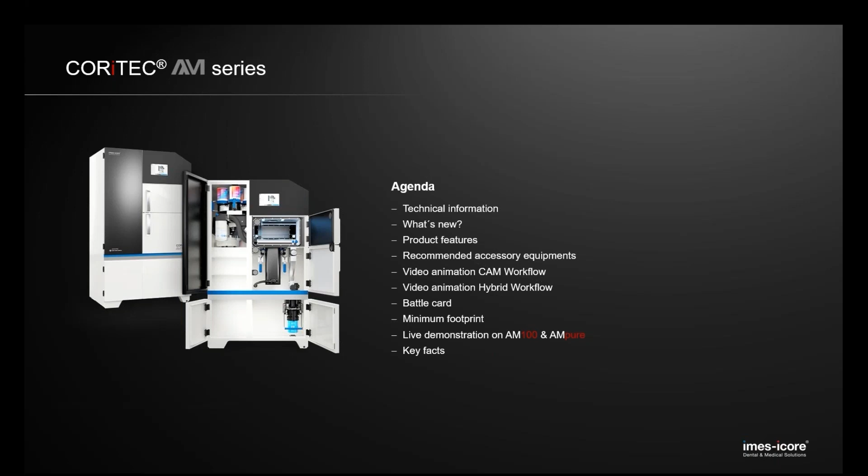In this presentation, we will explain the CAM and hybrid workflow using video animations. These videos can later be downloaded from our Dental Smart Market. During the presentation, we will switch live to Alex, and he will show and explain in detail the specific areas of the AM100 and AMpure. Let's have a look at the AM100.

The unit price for this unit is 121,000 euros. On the technical side, we have the powder supply with 25 kilograms of powder. This guarantees 24/7 production. With the 250% overdose function, we are able to look ahead if a cartridge is empty, and in this case the printer takes the next cartridge to build the job.

Loading the machine with prepared new powder during the ongoing production process is possible, of course. A 200-watt fiber laser is built in, and we are able to produce up to 500 units per day. The power supply connections are standard, and a high tension current connection is not necessary. The powder and cartridge system is certified and quality-tested powder for the CORiTEC AM100 system.

Supplied ready to start in the proven form, the powder container also serves as a supply container in the machine. The material is fed directly into the process without excessive filling and without getting into contact with the powder. Alex, please show and explain the function of the AM100 cartridge system on the unit.

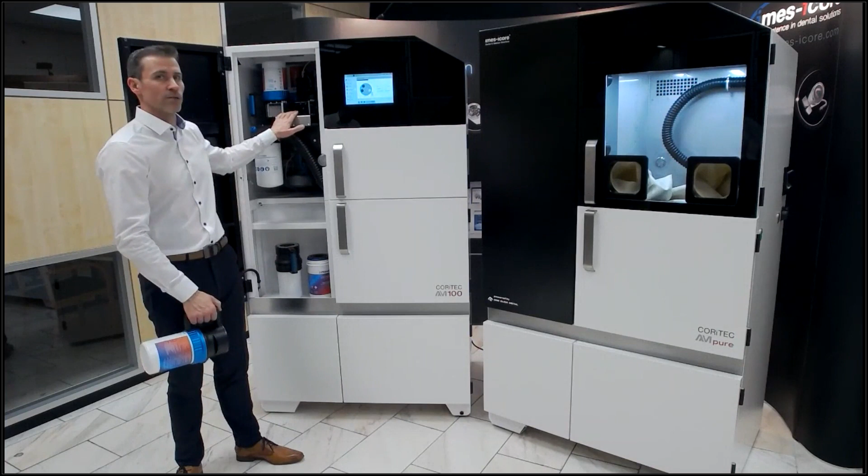The powder supply of our AM100 printer is located in the upper left-hand area of the machine. The unique feature is the closed cartridge system, which is easy and convenient to handle. The revolver module has a capacity of 5 powder cartridges, and each cartridge contains 5 kilograms of metal powder. With this special solution, we have reduced powder contact to a minimum.

Fresh powder is packed and delivered in special cartridges. The operator simply has to screw the interface onto the cartridge and enter the initial information about the material and fill level in the user interface. The cartridge is now ready to be used in the printing process.

We have two different types of cartridges: one is the overflow cartridge with the black safety ring, and the other is the supply cartridge with the blue safety ring. This allows the operator to directly recognize which type of cartridge and which material he has.

Due to integrated NFC tags in the cartridges, located in this part of the interface, the machine automatically recognizes which cartridge has been inserted. The status and fill level of the cartridges is displayed in the user interface. The supply of fresh material into the building process is completely automated.

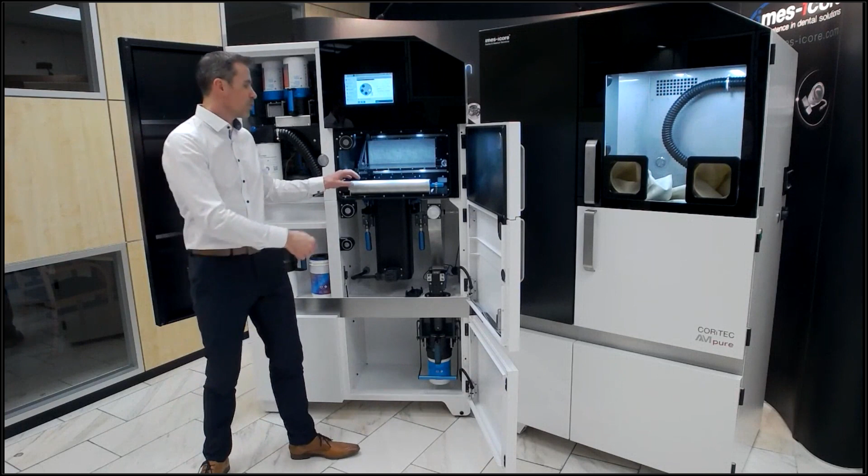On the left side of the process chamber, you have the powder dosing system, which ensures a continuous powder flow during the building process. Right here, we have the coater. The coater applies the powder over the building plate. It moves from left to the right.

This means from the powder dosing system to the overflow. The 200-watt laser is integrated on the top of the process chamber to ensure that you always have the whole building plate covered with powder. The conveyor system provides some excessive powder.

This excessive powder is transported by the coater into the overflow slot. It falls into the funnel below and is collected there. By activating the operating button on the user interface, the excessive powder will be transported into the overflow cartridge.

So how does the laser melting process in our AM100 basically look like? The building plate is clamped into the building module and aligned to the base plate. The coater spreads very thin layers of 20 or 40 microns of metal powder over the building plate. The laser on the top of the process chamber melts the powder in the areas where the components are located.

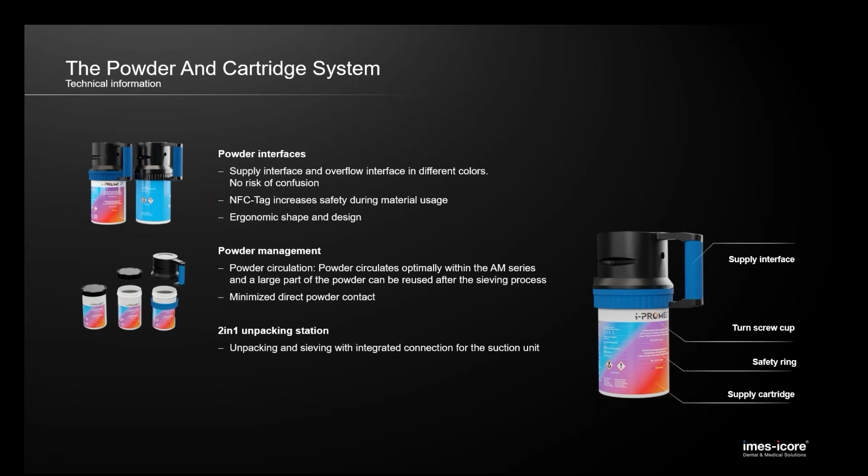The AMpure, with the unit price of 45,000 euro, is a 2-in-1 unit. It is an unpacking and sieving station in one. The customer has the big advantage that he can unpack his building plate in the unpacking station and he will not lose the powder. Also, he cannot get in direct contact with the powder. After the unpacking, the remaining powder will sieve automatically for reuse.

For some markets, we have the AMpure Lite with the unit price of 30,000 euro, for markets which are not so sensitive in relation of powder handling. Therefore, we have the option to order only the AMpure Lite, which is the sieving station. The powder which was used in the AM100 can be sieved in the sieving station and reused in the AM100 printer for new building jobs.

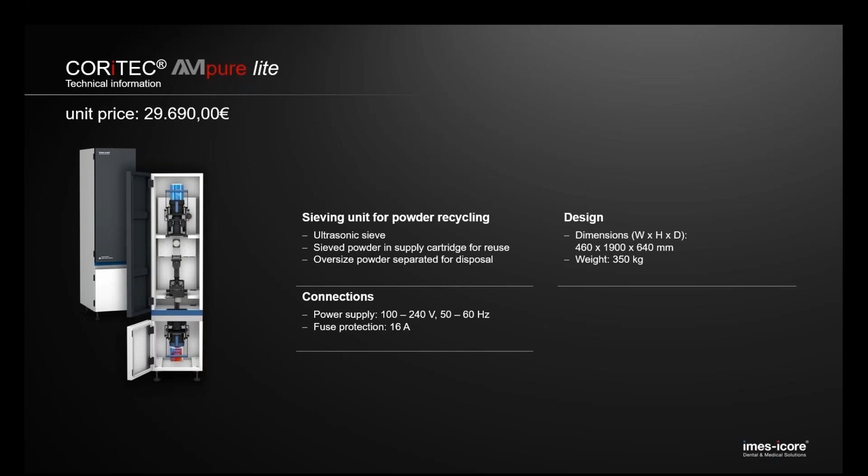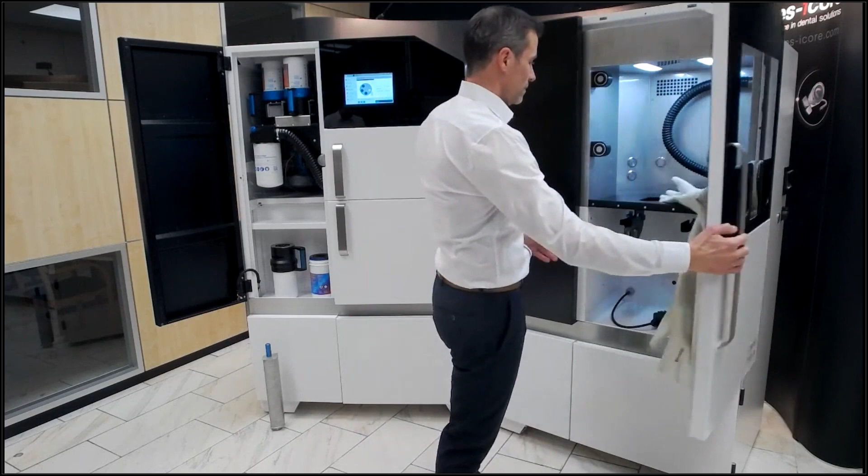Alex, please explain us more about the function and using of the sieving and unpacking station. In this step, I will show you the sieving and unpacking station AMpure. Here we have basically the same system as in the printer AM100. You disconnect the safety cap from the building module, put on the plug, and then you can fix the building module mechanically with the help of the levers.

When the doors are closed, the buttons on the rear wall of the unpacking chamber can be operated by using integrated rods. You can see the operating buttons here. The loose powder surrounding the components can be swept into the overflow slot on the right side of the unpacking chamber by using a brush.

From the overflow slot, the powder falls down into the funnel and will be automatically conveyed into the overflow cartridge below. Powder residues on your parts and in the unpacking chamber can be removed by the integrated vacuum cleaner connection. So again, as soon as you open the door, all the powder should be removed and you have really minimized the powder contact. The focus is on a really easy operation for the user.

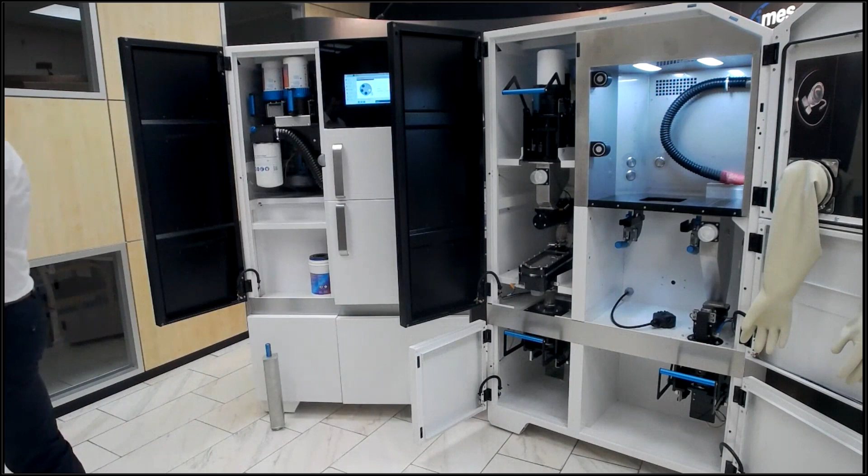What's new? The latest development from imes-icore is the integration of titanium powder into the AM100. This means that with this printer, you are able to use titanium and cobalt chrome. We cover both materials and can print all indications and dental restorations. Existing printers already installed in the market can be upgraded for titanium.

The next innovation is that we give the customer the opportunity to choose between two different parameters with which the printing should be started. The difference between the two values of 20 and 40 microns is not obviously noticeable, but can rather be seen under the microscope.

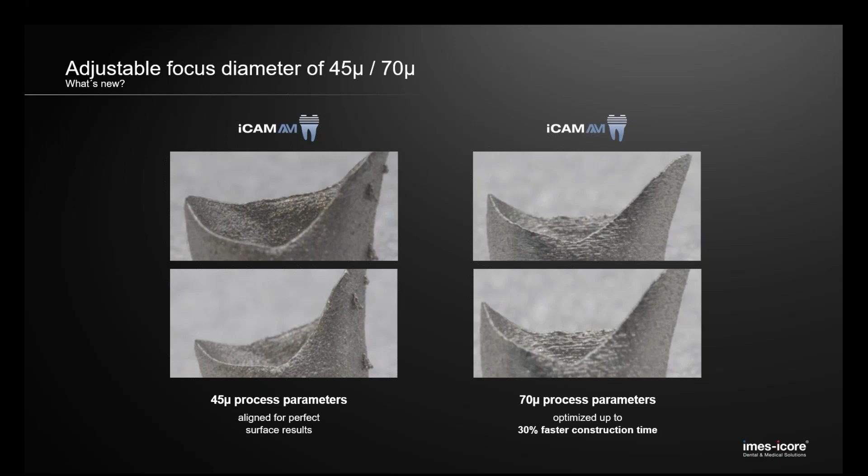70 microns can be used for faster and mass production. The printing time with 45 microns is approximately 11 hours for the complete square plate. With 70 microns, your printing time is 30% faster and shorter. Up to 250 units can be printed in this time.

The next improvement is that customers who have one or more other printers in their company and use the Oqton software are able to add the AM100 into the Oqton software. imes-icore and Oqton have closed a collaboration together, which means that the Oqton slicer software now supports AM100.

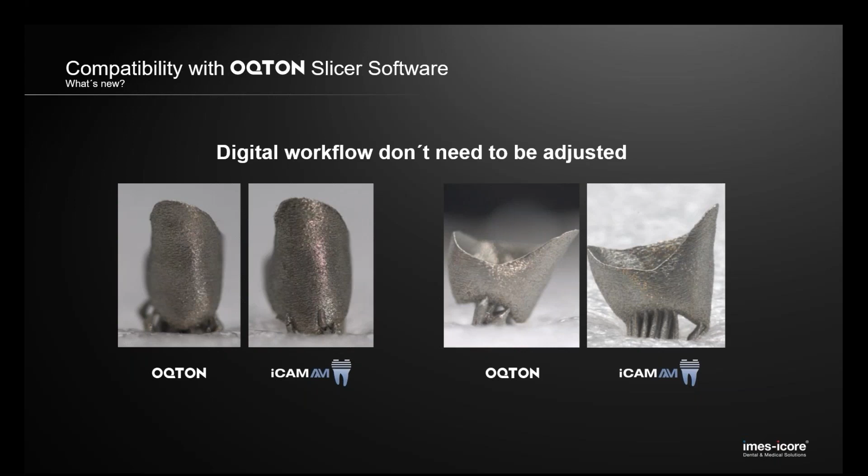This is a great opportunity, cost-effective method, and advantage for customers who have other printers installed in their lab. You can add the AM100 into your existing workflow, and the digital workflow doesn't need to be adjusted by you.

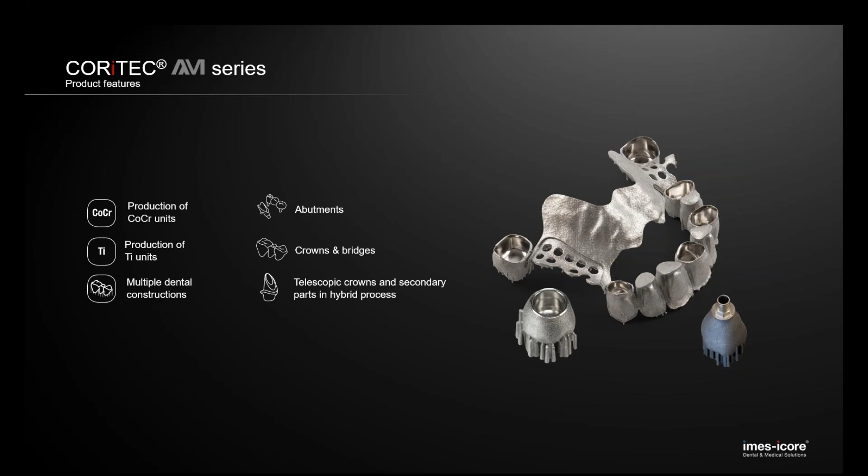As both materials, cobalt chrome and titanium, are supported, there is no limitation of indication with both materials. Crowns, bridges, abutments, and multiple dental constructions can be printed. Instead of milling or casting removable partial dentures, you can print removable partial dentures too. Depending on the size, we are able to print between 6 to 12 removable partial dentures in one job.

The biggest advantage of the AM100 system is that hybrid processing with imes-icore machines is possible without limitation, and it's integrated into the complete digital workflow. For the hybrid process, you take the round building plate of 115 millimeters in diameter and print on this plate.

After the printing, we put and use this round building plate in our imes-icore machines. You can print high superstructures in titanium and or cobalt chrome and remill the implant surfaces directly in the imes-icore machine after printing. The milling and printing time together is faster because in one job cycle we can put different indications on one plate. The hybrid solution is available for the 350i series and 650i.

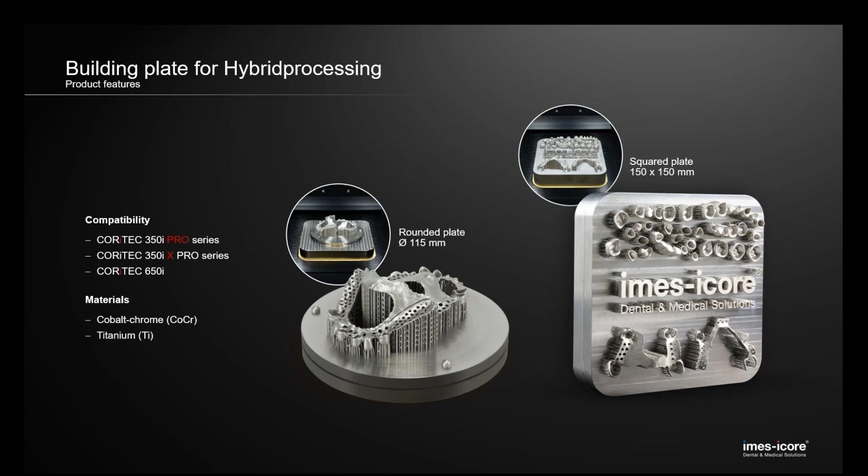This step will be described more in detail in a video later. imes-icore is the only company offering a complete validated workflow for the hybrid process with its own products. Additionally to the machines and powder, you only need the ICAM V5 software and the ICAM hybrid add-on module. ICAM AM is the slicing software for the printer.

This means that imes-icore tested and validated these three software modules with approved powder, ensuring a high precision result after printing and milling.

With the AMconnect remote access, you are able to monitor the printing process from your home or wherever you are. A camera is built into the AM100, and from wherever you are, you can monitor the printing job, see the remaining time of the current construction job, and in case of an emergency, abort the job. To use AMconnect, you need a PC, a laptop, or a mobile phone with an internet connection.

The CORiTEC AM100 HMI is a friendly and easy operation software for the AM100. With only 6 clicks, you can start the printing job. The software guides you step by step, so you are not able to make a mistake.

The design is very simple, intuitive, and reduced to the minimum. It leads you through all of the steps. You can go through the menu sections and check if the machine is prepared correctly. If the settings are correct, the individual points are ticked in blue. You don't need big expertise to start a building job, which is really convenient to use.

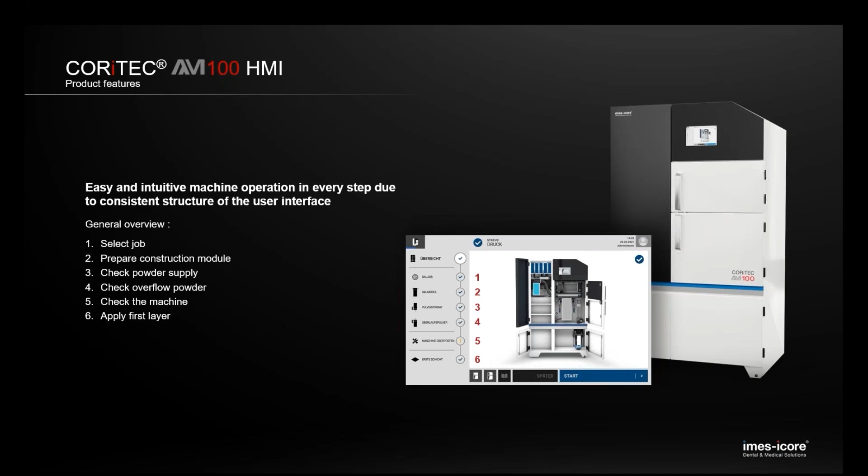Besides the AM100, AMpure and software, we are offering accessories which you need to have a complete system. These are suction unit, chamber oven, annealing furnace, gas generator, and metal bandsaw.

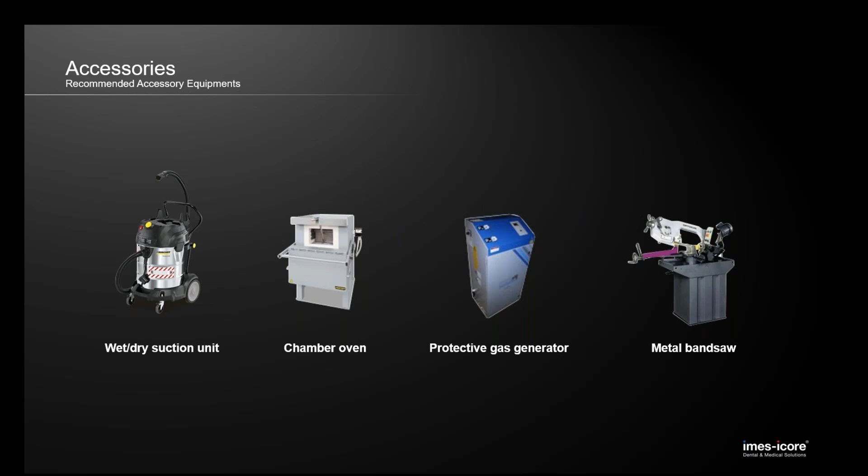As I told you in the beginning of the presentation, part of this webinar are some videos which are showing the different steps of the complete digital hybrid workflow. Let us start with the first video, how to work with the CAM software and prepare the dental restoration in the CAM software for the printer.

For metal printing and remilling of objects with CORiTEC machines, we need the CAM applications iCAM V5 Smart and iCAM AM. After selecting iCAM V5 Smart, we use the New Job button to select the milling machine with which the remilling work will be carried out later. We select the material, cobalt chromium, and the machine holder on which the 3D job will be built and reworked afterwards. After confirmation, a window opens to select a suitable construction type for the remilling, for example, bridge.

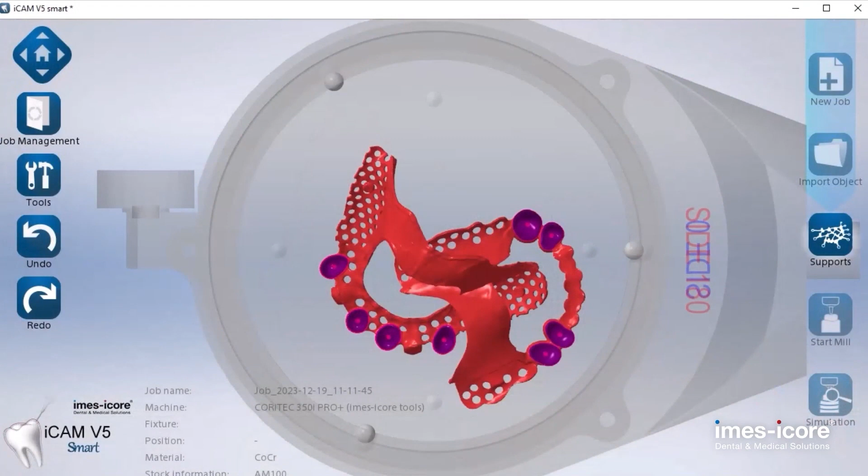At the same time, we load our two project files in STL format from the browser into the holder. After confirmation, the two objects appear on the holder. They show up in red because there are some overlappings. Click on an object to highlight it and use the positioning arrows to move each one until both appear collision-free on the base plate in gray. You can lift them up or lower them, tilt them, just bring each of them in any suitable position.

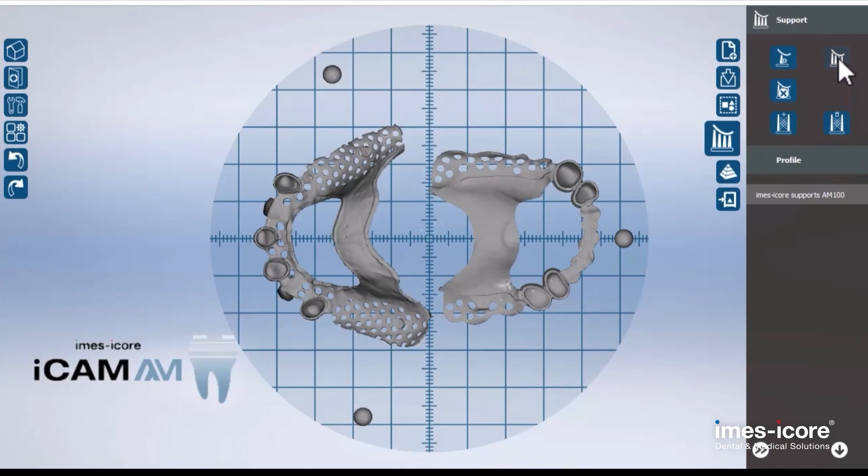The button at the top left allows us to inspect the objects step by step from standard perspectives without having to rotate or tilt them with the mouse. Next, we want to create the supports, which is handled in the software iCAM AM, so we must export the STL file there. The supports are generated by the iCAM AM software, also named the slicer software. Click the button to get there. This is where the job from the iCAM V5 Smart software with all the orientation geometries is transferred.

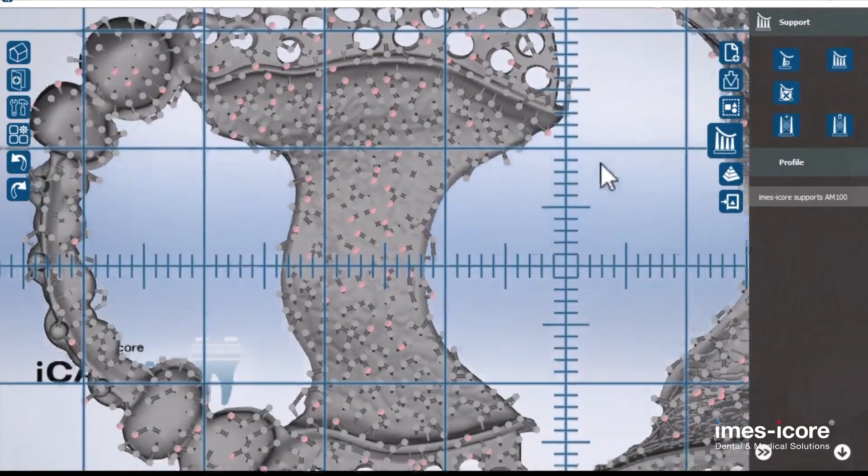Now we need to create the supports. Click the icon and after a short while you will have them constructed. Hundreds of tiny props are built as supports that will carry the objects in space upon the building plate. They can be viewed from different perspectives, for example from the bottom, where they appear as small dots. These supports can now be edited. Each one can be moved or deleted if superfluous. If supports appear inside cavities or at inappropriate places, delete them. Different perspectives help to get a good image of the whole construction.

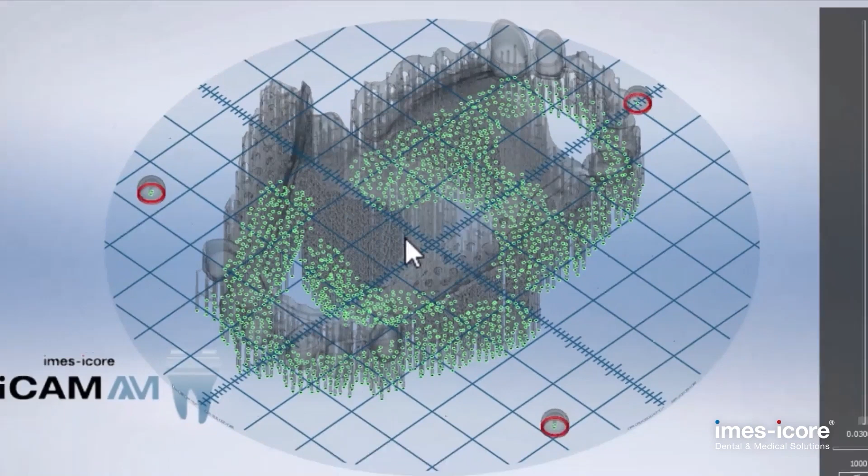If the supports are all okay, we create the print file by slicing. This is the principle of how the laser at the end will act to build it slice after slice, layer by layer. Click on the pyramid button and add, for example, the descriptive name demo plate to the end of the print file to distinguish it. In a simulation, we can now have a preview to examine the printing process layer by layer and inspect it moving forward and back. If the structure meets our requirements, we close the simulation and switch over to the print button.

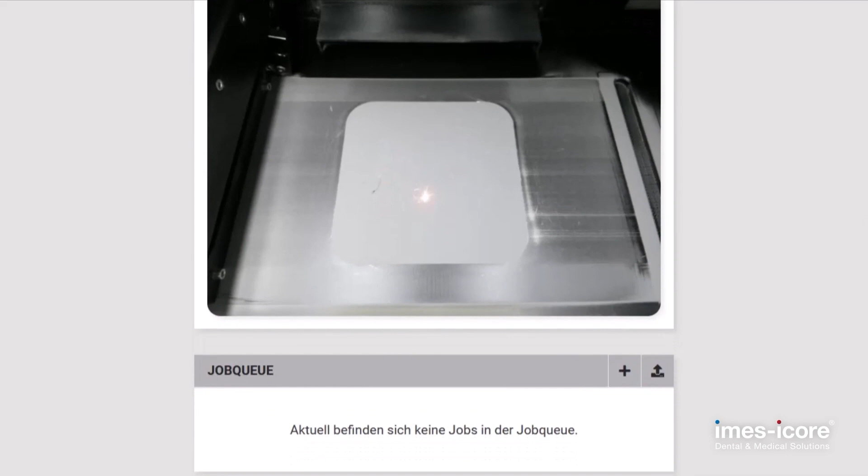This will now open the AMconnect remote software to transfer the print job we have just created directly to the job queue of the AM100 machine. Everything now has been done and we are ready for 3D printing.

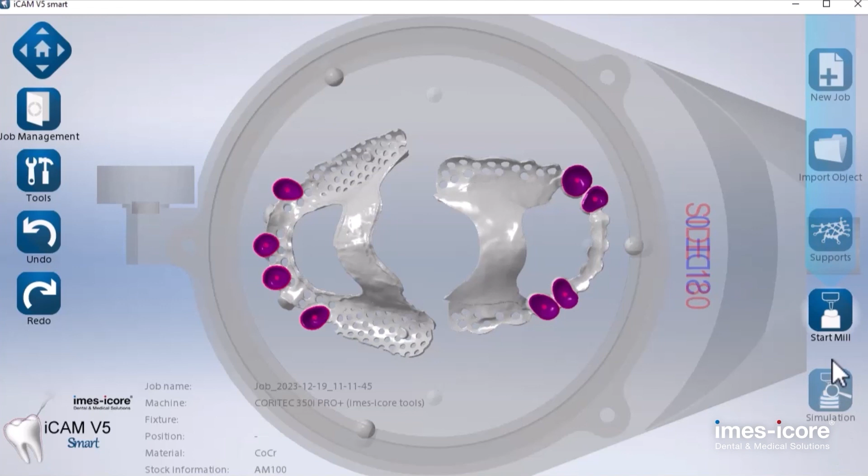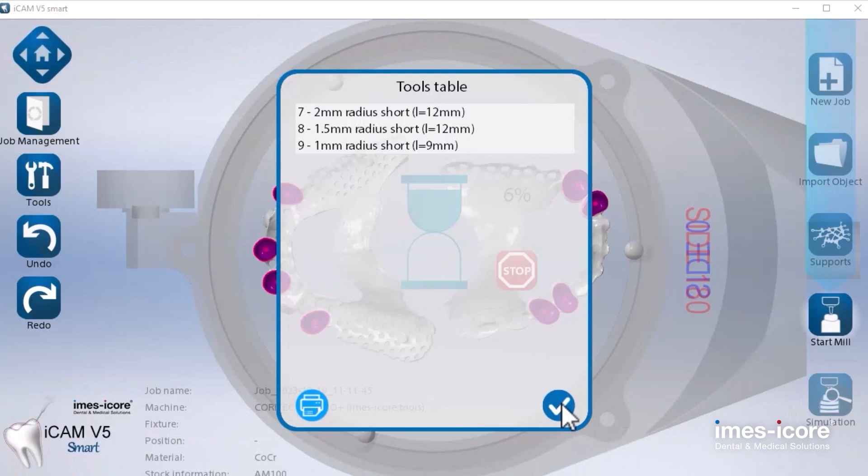But we already have the remilling in mind and switch back to the iCAM V5 Smart software to generate the milling file. The purple colored areas are those that need to be remilled with the aim to reach a perfect engineering fit for the cavities. The details of the milling strategy are displayed, showing the individual steps of the milling process. A milling cutter list provides an overview of the required tools. The milling job now is generated. Now the work of building the job with the CORiTEC AM100 machine begins.

Okay, the second video describes how to prepare the building platform in the AM100 printer and how we start the restoration in the software.

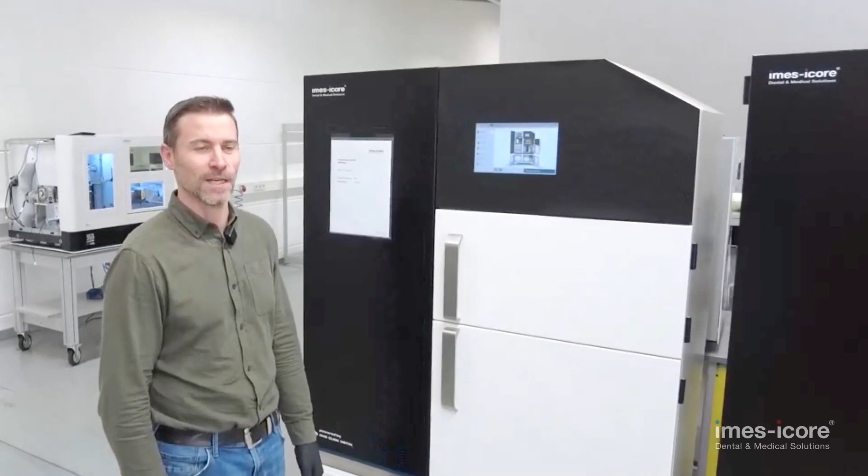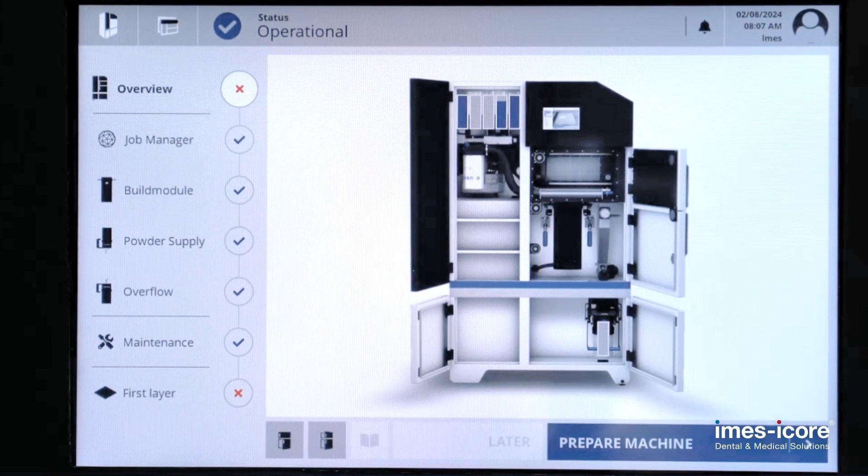In this step, we will learn how to prepare the AM100 3D printer and start the job in 6 simple steps. The machine already is switched on, the operator is logged in, and we see the screen of the machine's monitor. You see a general overview and, on the left, the menu with the 6 options mentioned before.

In the Job Manager, we select the construction job that we had previously nested. In the area on the right, there is additional information about the job, such as the number of layers, the powder required, and the printing time, a total of 7 hours and 22 minutes.

We switch to the menu item Build Module. The Build Module is shown here. It is inserted and electrically connected. So far, everything is fine. We see the dark blue tick behind the menu item.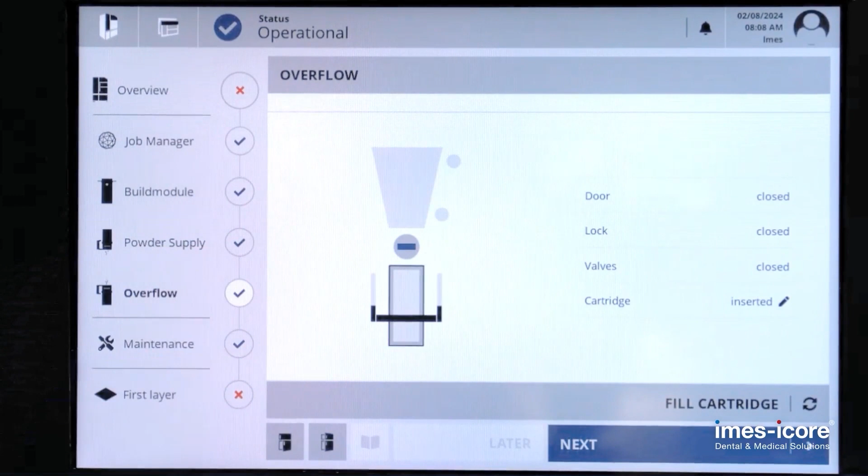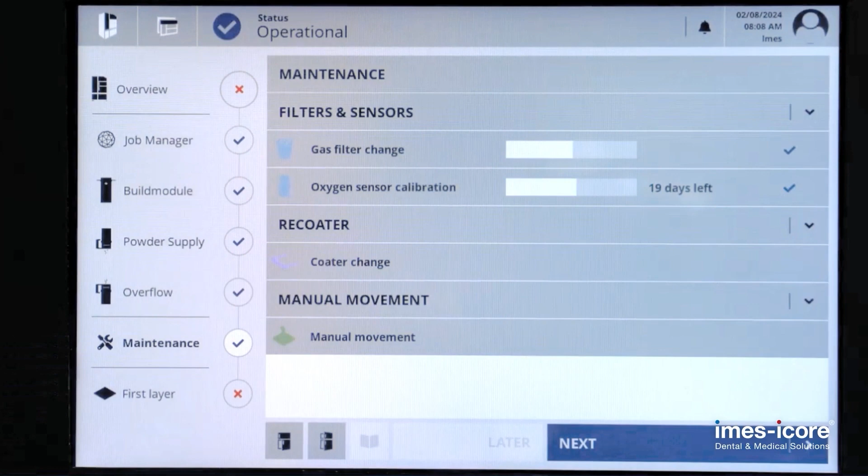The menu item Overflow shows the overflow container and the overflow cartridge. Both are highlighted in gray and are therefore empty. This means that the elements are ready for the next job, which is indicated by the blue tick. In the maintenance menu item, we see the display for the gas filter and the oxygen sensor. The gas filter has been replaced lately and the oxygen sensor calibration is still valid, so both are okay.

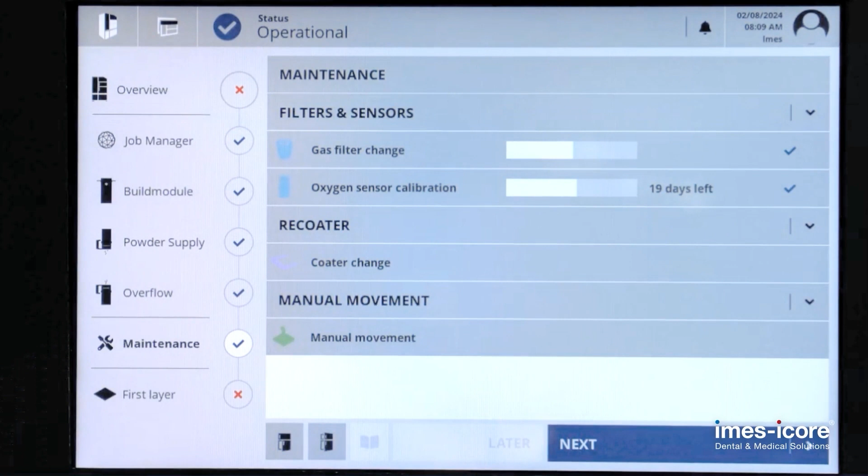In the last item, First Layer, we prepare the first layer of cobalt chromium powder. To do this, we select Supply a lot of powder and Coat. The wiper immediately starts to lay out the powder. In the first passes, a lot of powder is laid out so that the spaces between substrate plate and adapter plate are filled as best as possible, and then an even first layer can be laid out over the round building plate. You can now see that the round building plate is shimmering evenly and that a wafer-thin layer of powder has been applied to the entire building plate.

We finish the process of laying out the first layer and the menu jumps back to the build job, which we check again and confirm accordingly. In the menu on the left, you can see the file name of the print job, the number of layers, the start time, the end time, and the amount of powder required for the job.

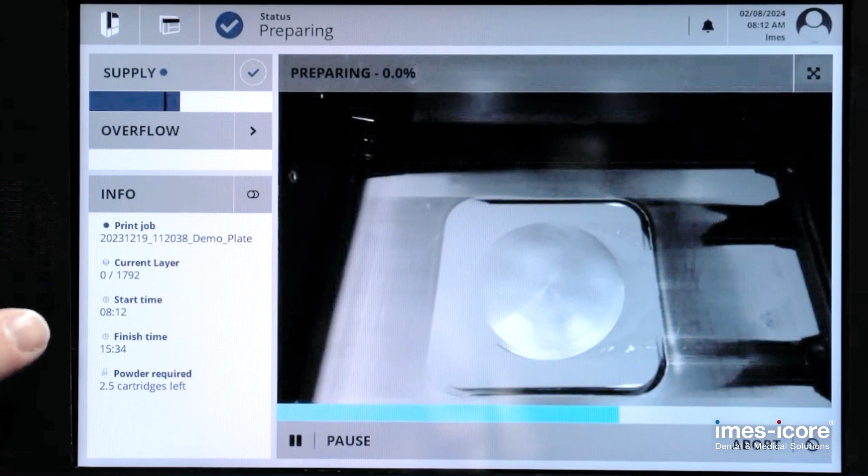Now the inertization process begins. The building chamber is flooded with nitrogen to repress the oxygen. The blue bar shows the progress. You can switch the display back to the inerting process. You can see the default settings for residual oxygen and the nitrogen flow rate. The target value for residual oxygen is only 1.5%. Above, see the flow rate of the inert gas. The set value here is 1.2 meters per second.

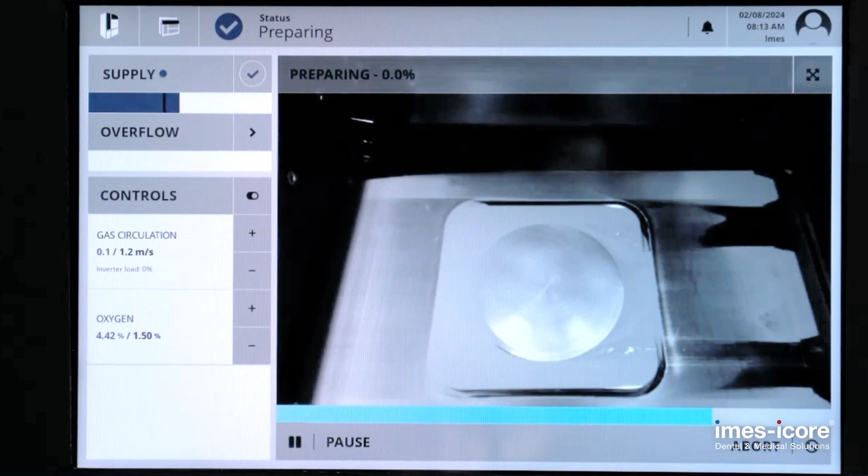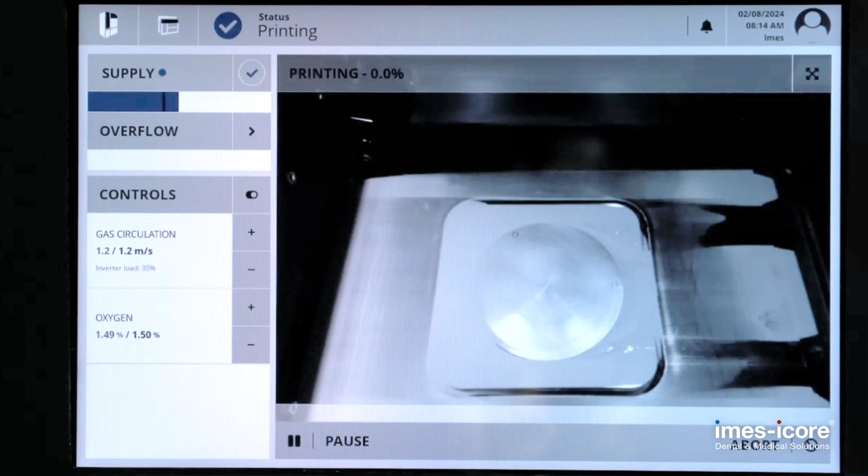The value of the residual oxygen indicates how long the inertization process will take. If the residual oxygen goes down to 1.50%, the building chamber is sufficiently flooded with nitrogen gas and the laser will start automatically. At the beginning, you can brightly see the 3 orientation geometries that are lasered on the outer edge. Then the sintering of the metal powder by the laser begins inside the plate.

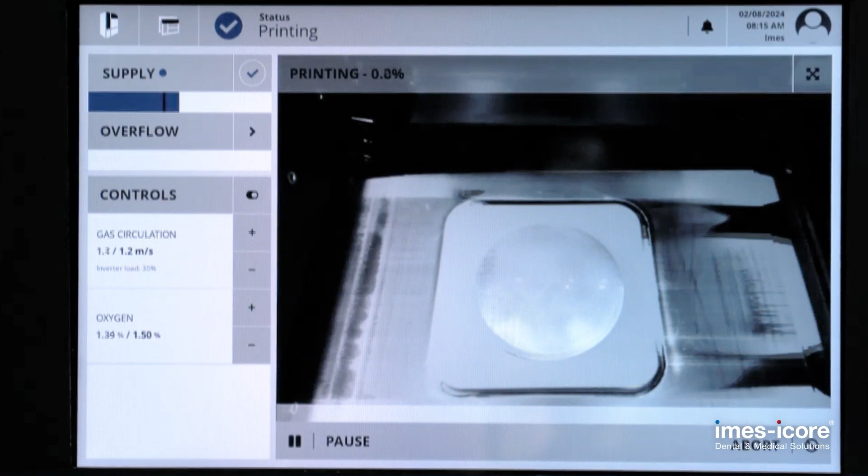We switch to the progress view in the info menu, where we can track the current status. Currently, layer 3 is in progress. Layer 4 is produced immediately, followed by layer 5 and so on.

In order to track the print job on a mobile device, use the AMconnect app. You select the machine and immediately see the current status of the machine's print job: the file name, the current layer and its total number, the remaining printing time, the powder supply and the status of the overflow container. A static image of the building chamber is generated and displayed every 3 seconds. Further down, the job queue is displayed so that you can track the status of your machine at any time.

Okay, this was our second video, which showed us the preparation of the building platform in the printer. Now, in the third video, we show you how to unpack the printing job in the AMpure and reuse the powder. Enjoy!

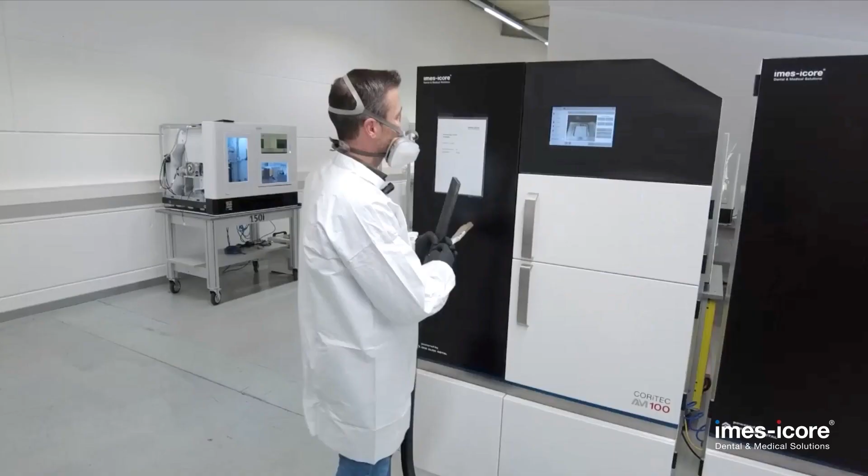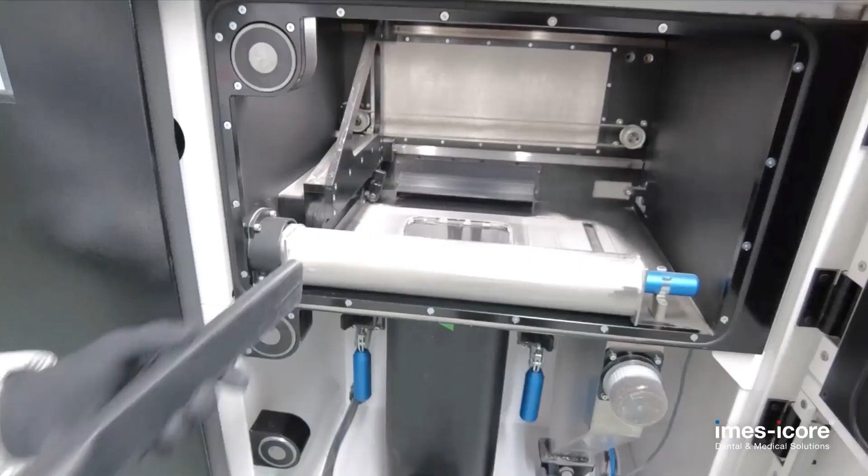In this video, we see how to remove the print job from the AM100 3D printer, insert it to the AMpure sieving station, and how to remove surplus powder for reusing it. You will need a brush, a vacuum cleaner, and isopropanol wipes. When opening the building chamber, it is the only phase in which we have powder contact. This is why the operator wears a lab coat and an FFP3 mask and rubber gloves.

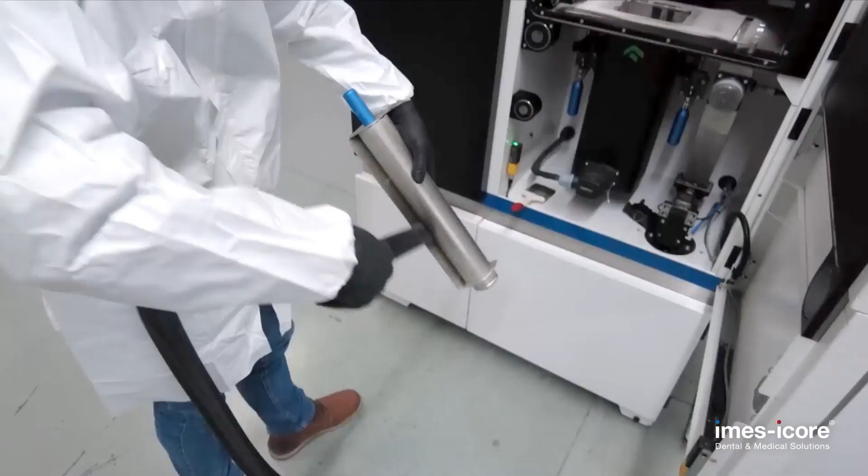First, all front elements are freed from powder. The baffle pipe is removed, shaken off, and vacuumed at the critical points. The remaining powder on the base surface is carefully swept into the build module and into the overflow container using a brush. In this way, as much material as possible is collected for reuse.

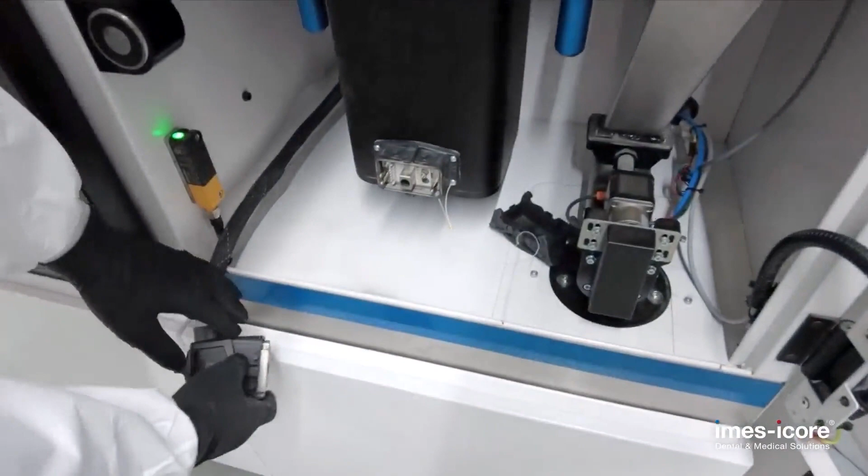All elements are carefully cleaned with the brush. The material that cannot be collected with the brush is vacuumed off the construction panel with the vacuum cleaner. The build module is electrically disconnected and the socket is covered with a cap. The build module now gets mechanically separated from the construction table, moving it manually by a lever.

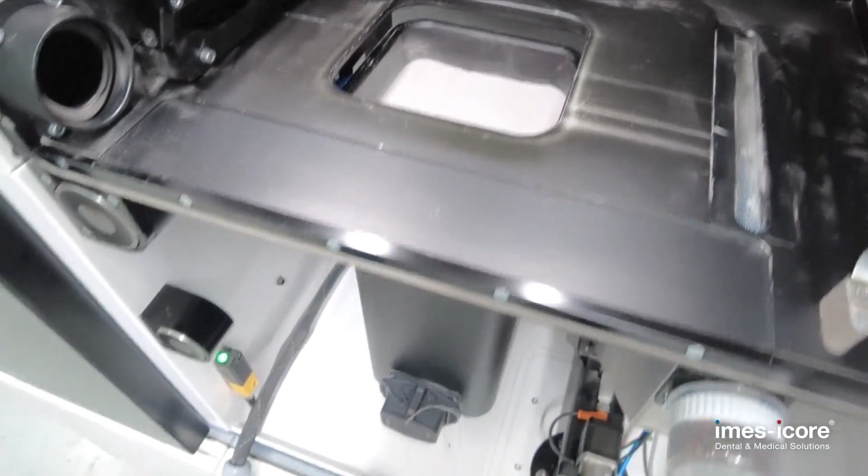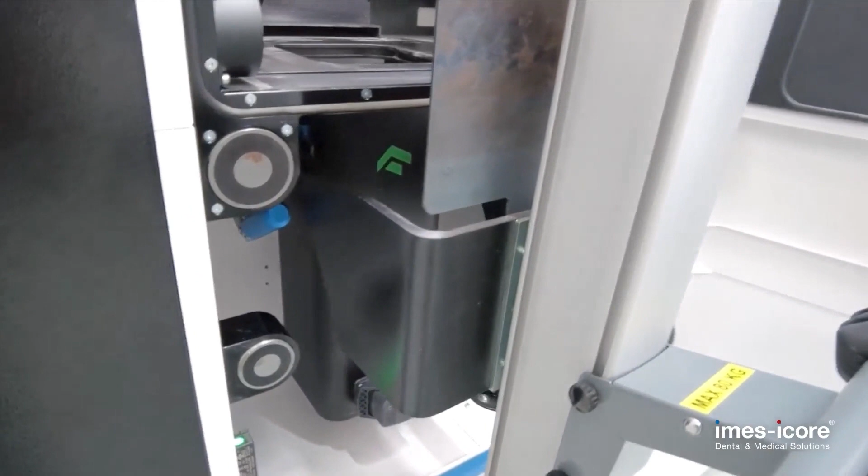The build module is lowered and can now be taken off and transported as a whole into the AMpure sieving station using a lifter trolley. There is a cover lid for the build module that can be placed on top to prevent powder material from escaping from the inside due to air turbulence or to prevent other particles from entering. We can do without this additional handling here in this situation because this step-by-step action doesn't require it.

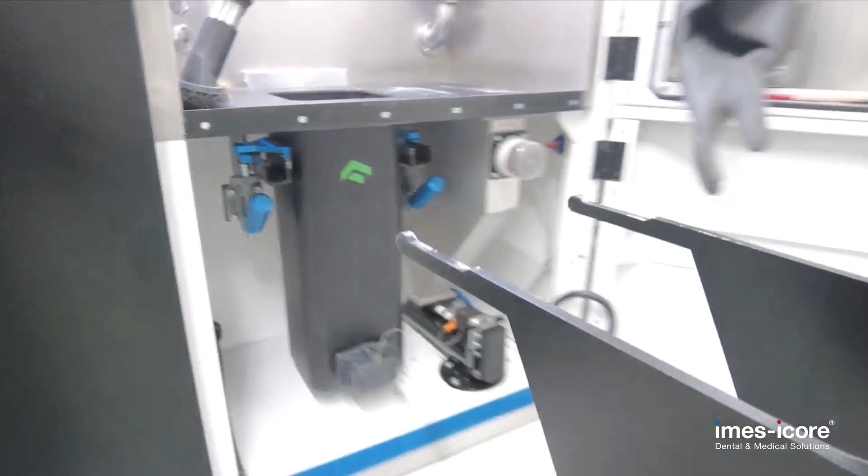Docking the build module to the AMpure is carried out using the same lever mechanism. There is an insertion cone on the underside of each blue handle of the build module. Both fit into the respective groove to the right and left, so that the right positioning is predefined. We check whether the build module has correctly snapped in and fix it mechanically by lifting it up with the levers. Now, to connect it electrically, the protective cap is released and the plug is inserted and locked in place with a rotary knob.

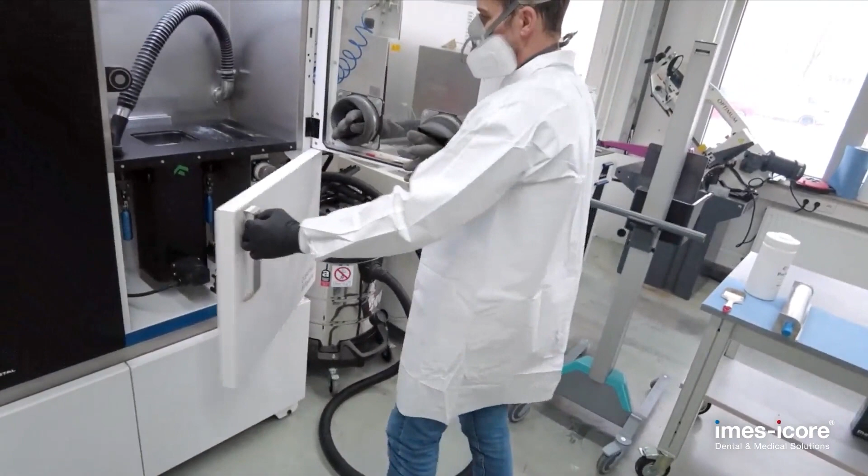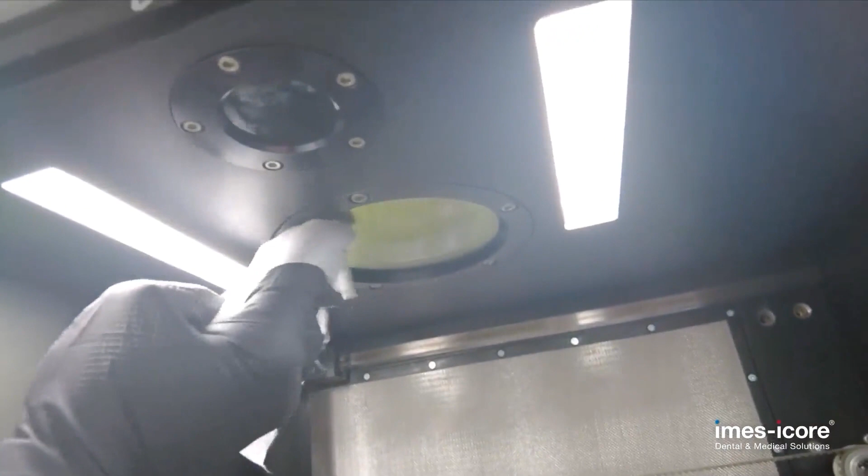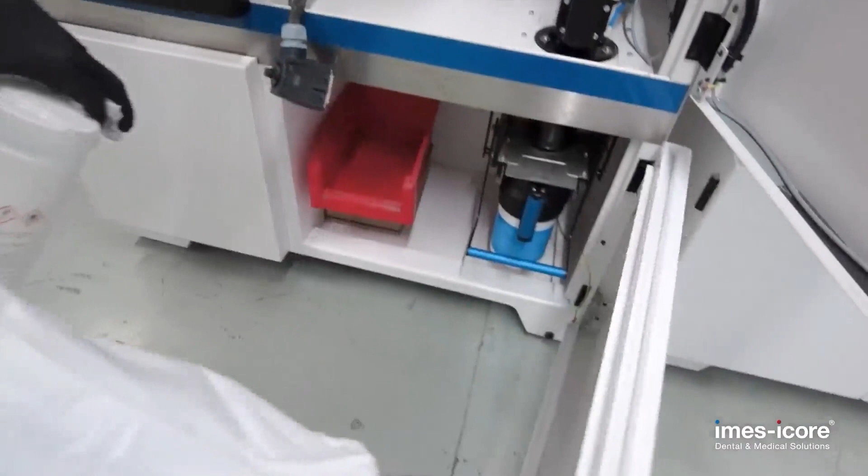The doors of the AMpure sieving station are closed and from now on we no longer have any contact with the powder. Before we start unpacking, we want to clean the building chamber of the AM100 with isopropanol wipes to prepare it for the next job. Excess powder is fed into the overflow container during the construction process and is collected there. For later recycling, the powder is transported from the overflow container into the overflow cartridge, which is located in the lower section of the machine.

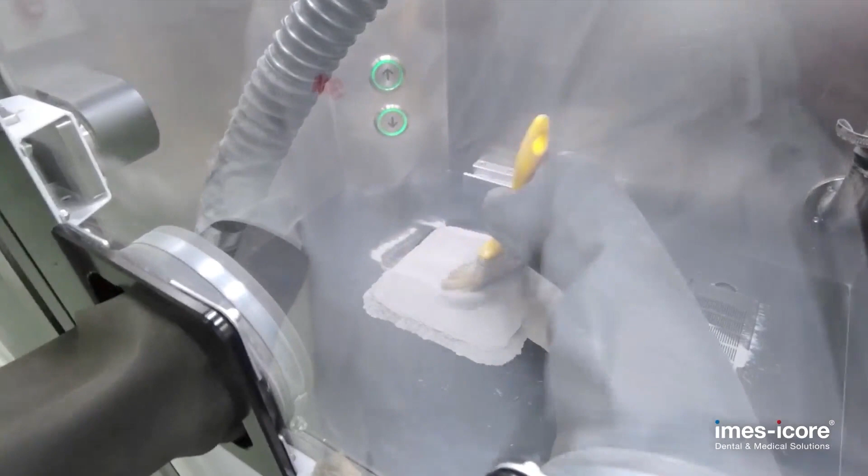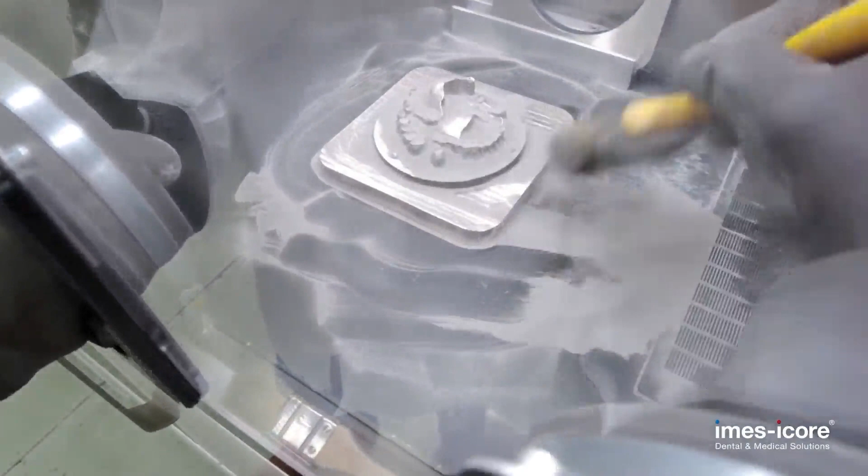So let's move to the AMpure sieving station. There are two buttons inside the sieving station to move the build module, one for the upward movement, the other for the downward movement. The powder material slowly comes to the surface and you can start to wipe the excess powder with a brush into the overflow container of the AMpure. All excess material is wiped into the overflow container step by step.

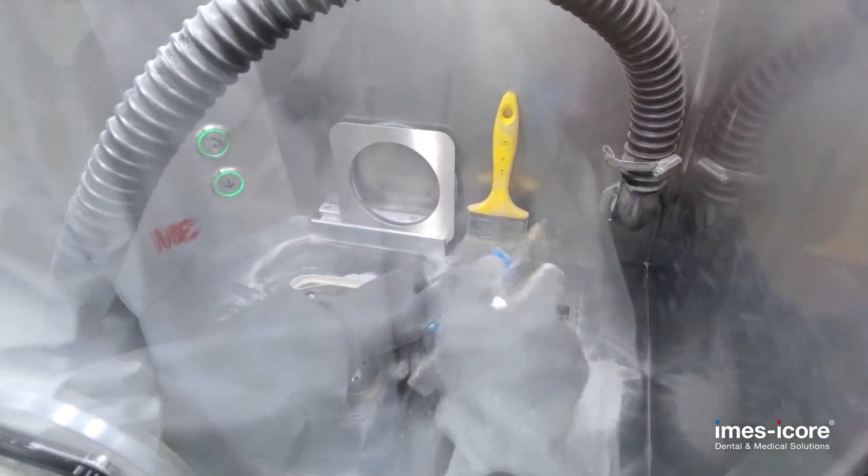The construction plate can be released with a twisting motion. The bayonet catch is released and any further excess powder between the supports on the build plate is shaken off and swept into the overflow container. After all is clean, we can open the door and take off the base plate with our metal printed project. And it looks fantastic.

Okay, now in our last video, we show you how to prepare the printing job for the remilling in a 350i Pro Plus machine, and you can see how the remilling process in the machine is working. Enjoy and have fun for the next video.

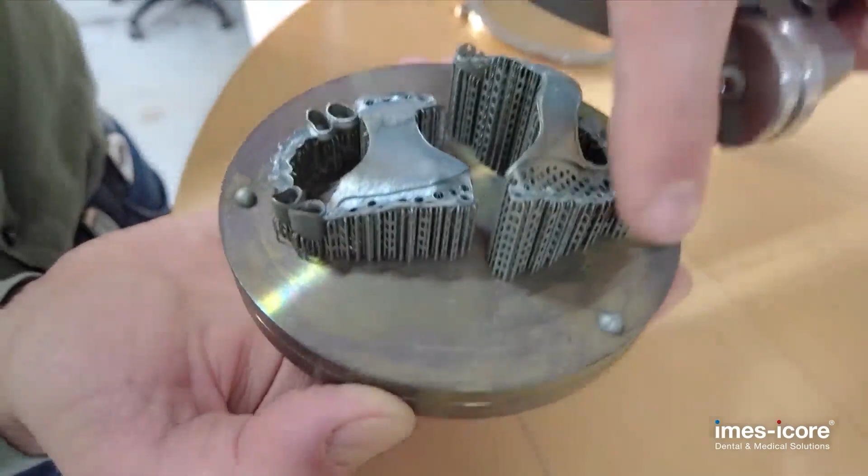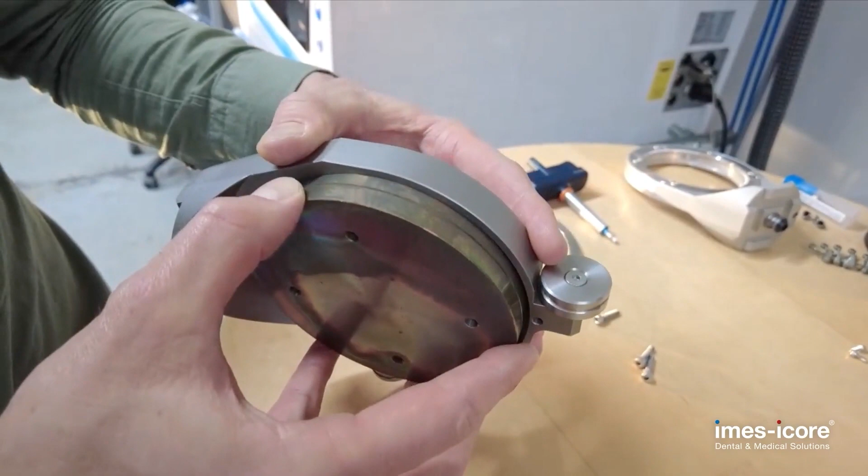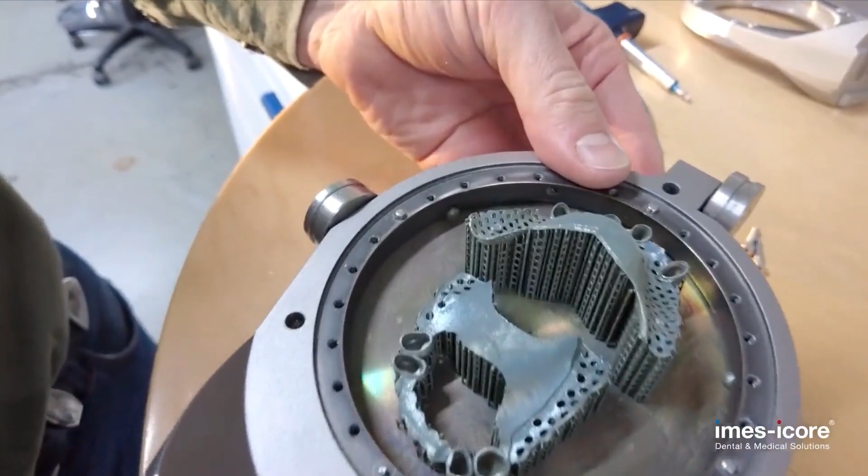Here we see the annealed and cooled work of which the cavities are to be remilled in the next step. For this, we have a modified holder, the hybrid holder for the 350 Pro series. There are 3 hemispherical asymmetrically arranged orientation geometries on the build plate, which fit into the grooves in the holder. This ensures precise orientation of the build plate in the holder. The orientation is correct so that the clamping ring can be screwed on.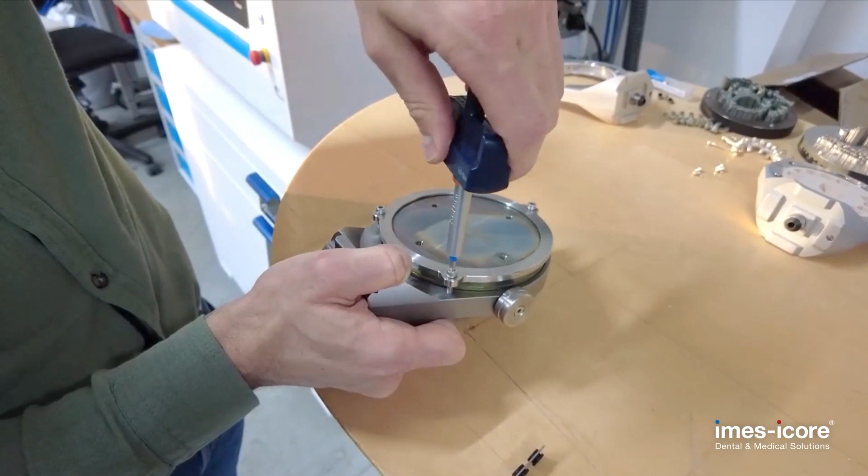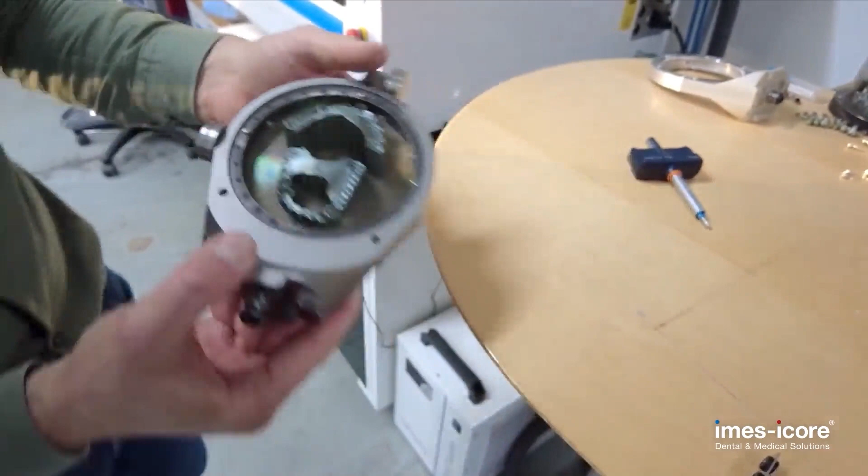A suitable torque screwdriver is supplied with the hybrid holder. It is essential that the screws are tightened to the appropriate torque, which is exactly 1 Newton meter. The build plate is now firmly seated in the holder and can be clamped to the machine. The zero-point clamping system is activated and the holder is firmly seated.

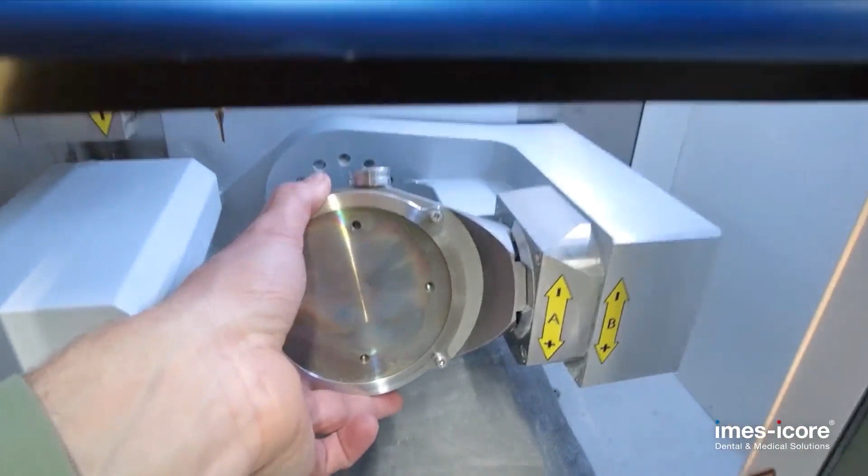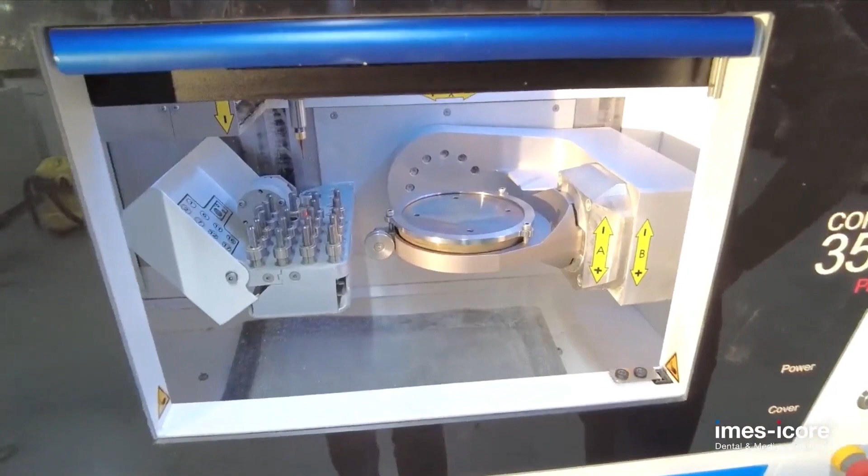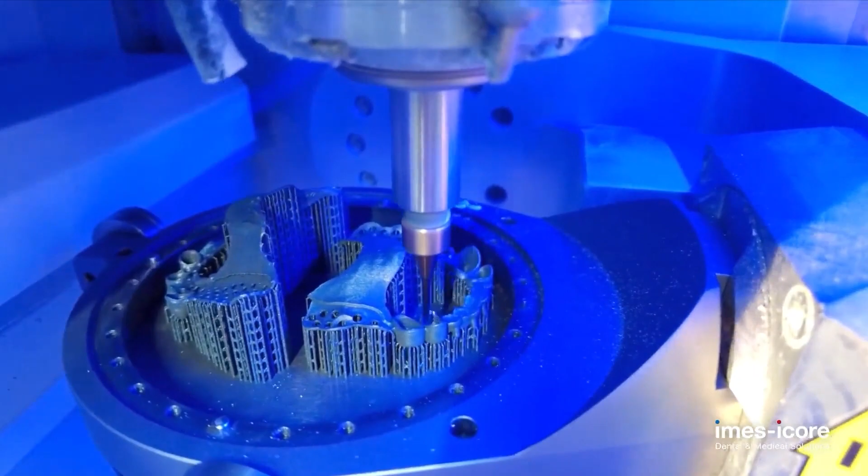The corresponding milling program had already been loaded so that the milling process can begin immediately. Now the milling process starts. The tool is measured and the cavities defined in the file which we initially had prepared are now milled. This ensures a perfect fit. First, the cavities are machined with the 2 mm milling tool. Then the tool is changed to a 1.5 mm tool, and finally the cavities are finished with a 1 mm milling cutter.

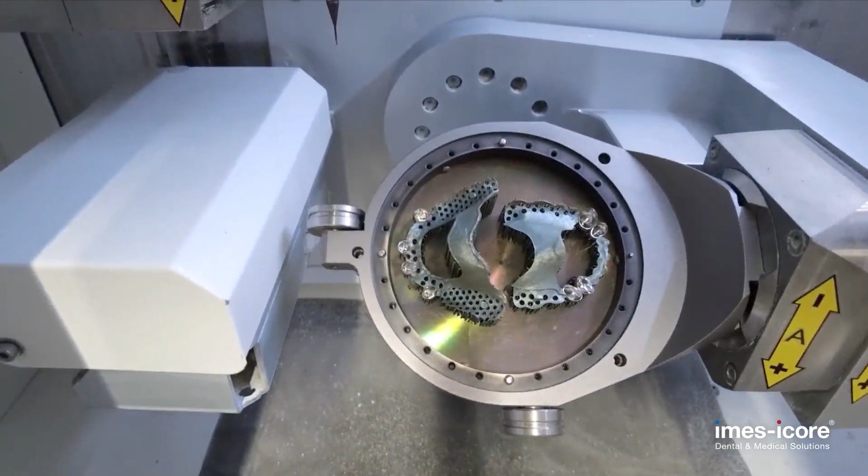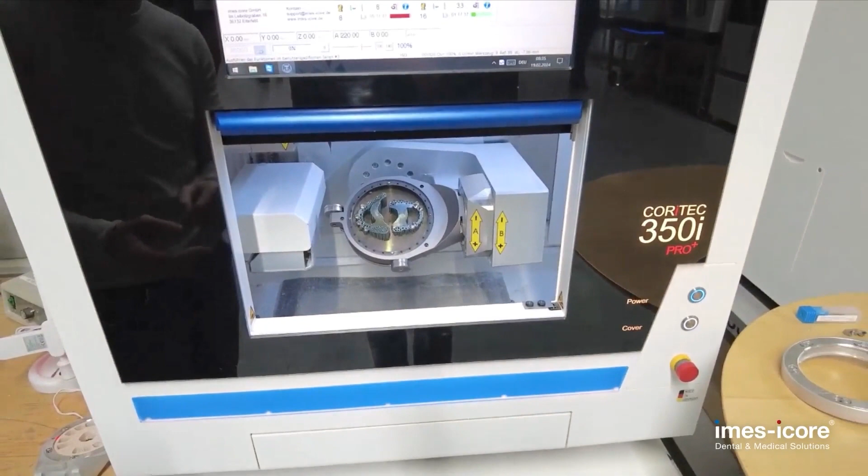The work has now been milled, and you can clearly see how the cavities differ in their material surface from the other parts of the work. We can release the holder and unscrew the build plate from the holder just as we had previously screwed it on.

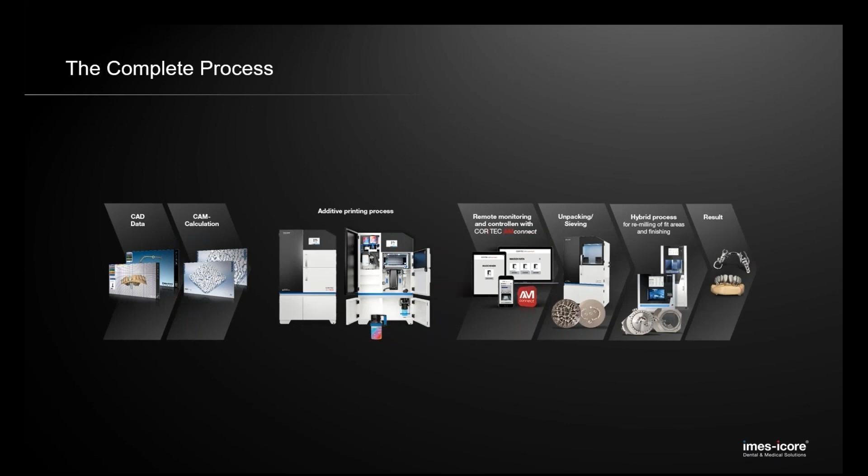Now we can inspect the result, and the next step is to detach the work from the metal plate. This happens by the use of a metal bandsaw. Okay, so as you saw in the video, a 3D touch probe is not necessary. The blank holder should be only calibrated once at a time, and then you can use the remill function in combination with the AM100 printer. Yeah, and then we have the result. I will show you the result in the camera.

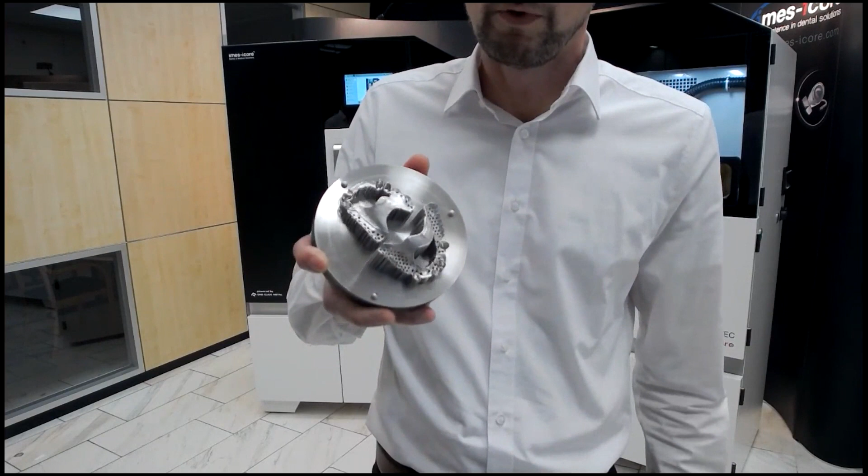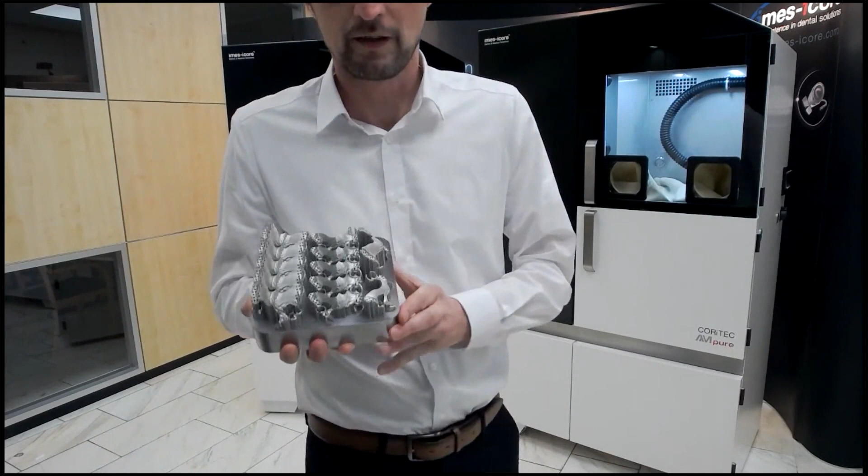So as you can see, we have the results here, which were milled. I will show you another plate. This is a 4x plate. We milled there, we printed 3 from 12 removable partial dentures, 4x. And here we have an example, on titanium with different indications for restorations.

Okay, let's take a look at the battle card. In this overview, we've chosen 5 other printers to compare with our printer. What we can see is that the AM100 has the biggest printing plate compared to the other printers. None of the printers has a substrate plate for hybrid processing. For safe and healthy work handling the powder, we have the AMpure Unpack station.

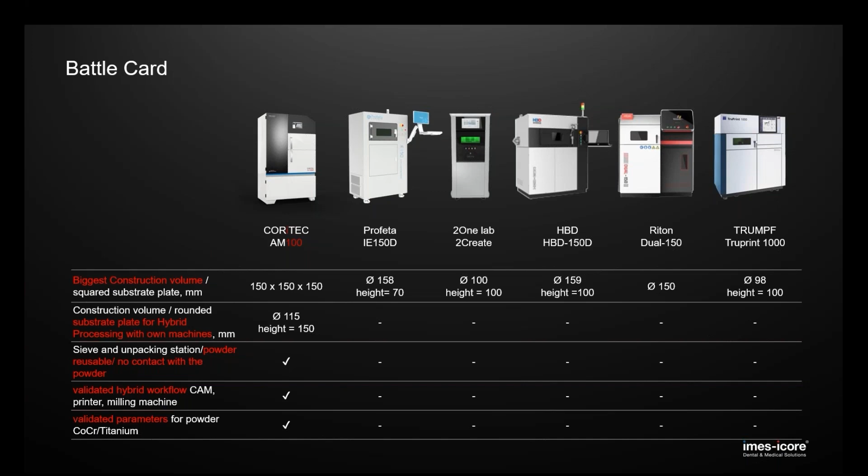Additionally, the sieve station can be used for recycling of the powder. A validated workflow is given and secured by imes-icore: for the slicing software, ICAM AM, CAM software V5 hybrid, machine series 350i and 650i, cobalt chrome and titanium powder.

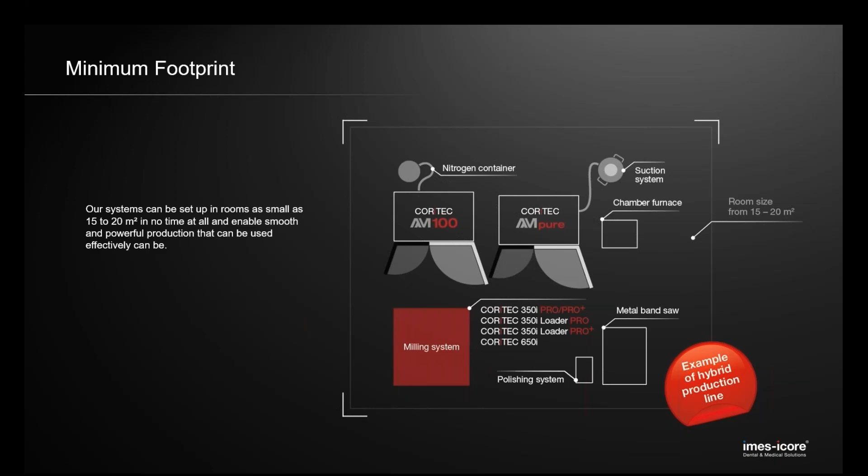The ideal size of a room is between 15 to 20 square meters. There you can place the printer AM100, the AMpure, and the accessories you need. Also, there's enough space to place milling machines for the hybrid milling. It means in one room you can set up the complete processing chain.

So let us summarize all important points which we have learned today. First, adjustable focus diameter for fast and mass production. Second, 25 kilogram powder magazine for a 24/7 production. Third, a big building plate with 150, 150 and 150 millimeters. With this, up to 250 units can be printed out.

Fourth point, imes-icore is the one and only manufacturer who is providing a hybrid solution with own products. For this solution, we are using a substrate plate with a diameter of 115 millimeters, which fits automatically to imes-icore machines. The next important point is that with the unpacking and sieve station called AMpure, the customer has the big advantage that he does not get in touch with the powder and saves up to 90% powder because of the recycling method in the AMpure.

The complete workflow is validated by imes-icore. All the components like software ICAM AM, ICAM V5 hybrid, the hardware like the printer AM100, the cobalt chrome and titanium powder, and imes-icore machines are all together aligned in one digital process.

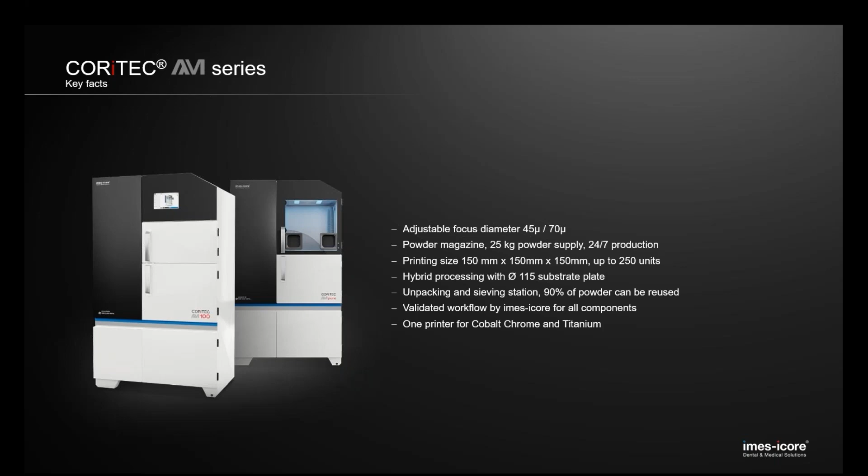Okay, so now we will answer some received questions. The first question: is it possible to add custom supports to the software? Yes, you can create your own supports for different types of restorations. The second one: do you need to calibrate the scan field of the laser in order to make sure the laser position on the build plate is correct? Yes, of course, we perform the calibration of the laser during the first installation or during the annual maintenance.

Can I use argon in the printer? Yes, it's also possible to use argon as a protective gas. How often must maintenance be carried out? For single shift use, only once a year. And if the machine is operated in more than one shift, we recommend half-yearly maintenance intervals.

Are there different annealing oven programs for the different applications? Yes, we supply two pre-configured programs with our furnaces, one for the standard annealing process, another for restorations with residual elasticity, such as removable partial dentures. Which slicing software do you need for the hybrid process? ICAM V5 Smart or Expert with the hybrid add-on.